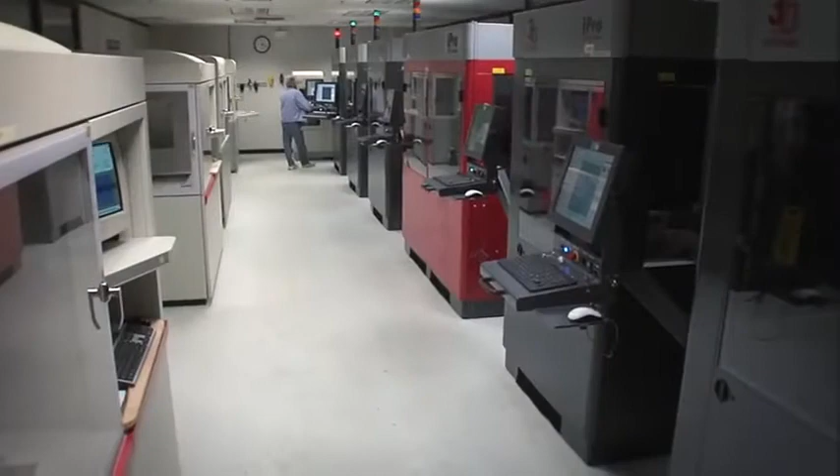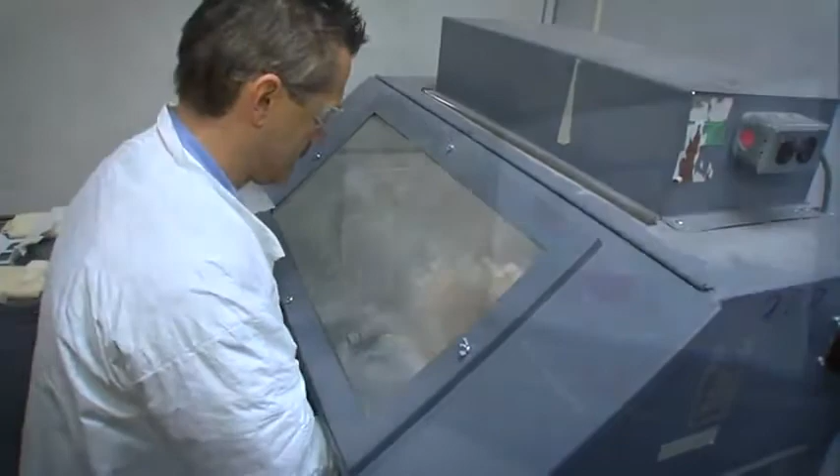This facility is operated by UAW 160 employees with some of the most competitive work rules in the corporation. These are very talented men and women, wood model makers, metal model makers, who basically operate these machines 24 hours a day, 7 days a week, 365 days a year.

These employees, these model makers, have taken their classic training and applied it to this new technology and come up with several innovations. In fact, some of the innovations that these men and women have created have become industry standards. Our technicians work so closely with 3D Systems manufacturing people that it has helped them modify their equipment or actually bring enhancements into the trades and the industry.

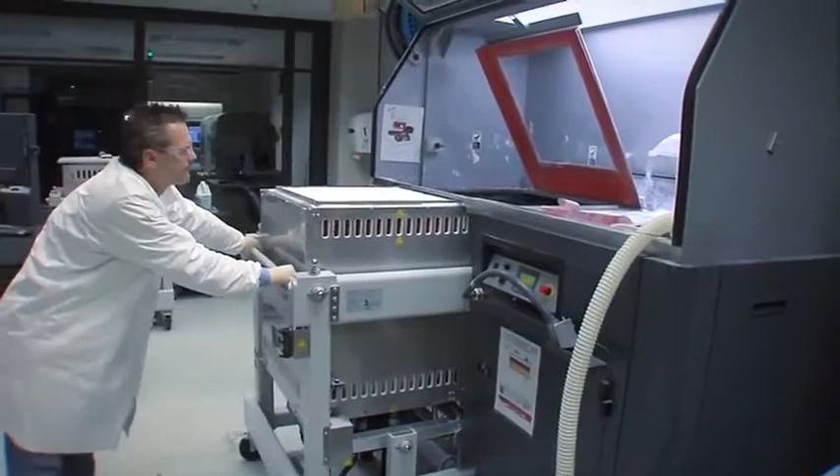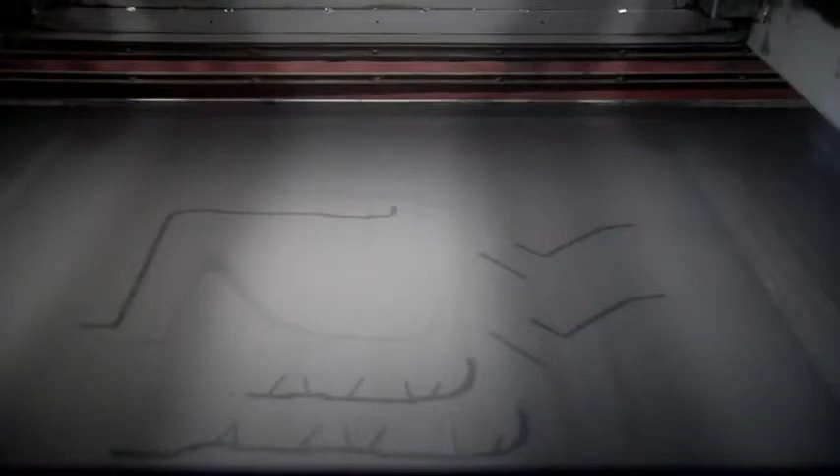Years ago, you would actually have to manually load those machines with this powder and mix those powders manually and then insert them. So they worked in conjunction with our folks to actually find automating ways of loading those machines. And through those ways of looking to automate them, we also found out, well, let's not look at just that. What about recycling some of this older material? Instead of just using always virgin material, let's go ahead and actually mix a blend of reused material with new material. And they've actually developed a machine station that combines those in one.

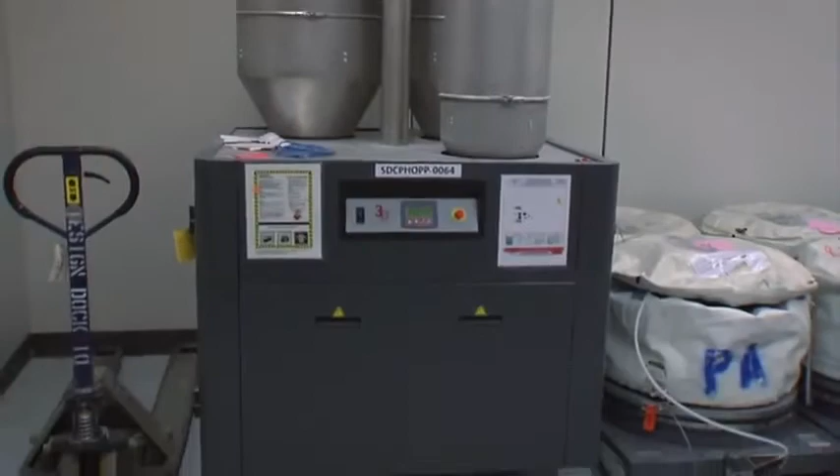To date, we calculate somewhere around 30% recycling benefit for us. And that again was with the collaboration of the local 160 skilled trades folks down here in this very lab. They never stop amazing me on how they come up with better ways to do it.

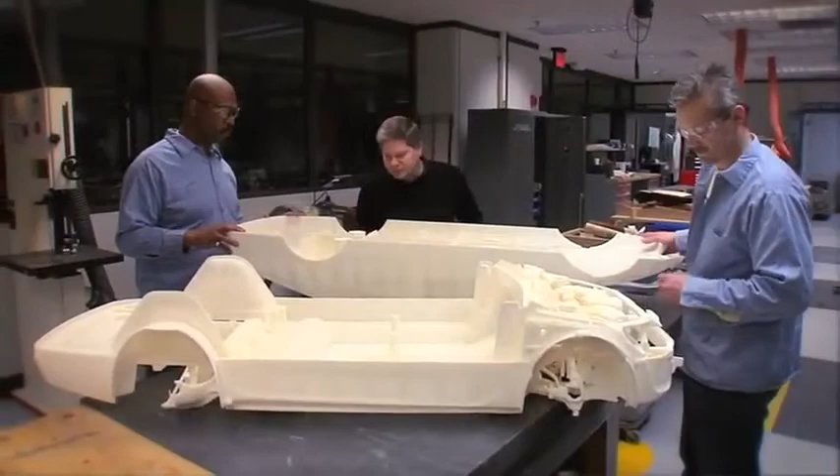I'm a wood model maker by trade. I've been in the RP lab for 15 years. The more I saw of it, I worked with it, and then I got into the department, and it just grew from there. It's unbelievable.

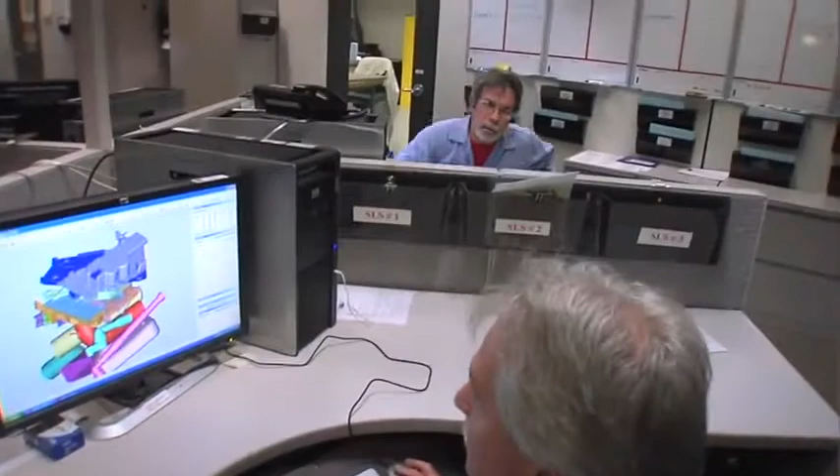And just seeing it advance, it's just great. I mean, things that we do now within a day or 2 days would take months to build by hand. We are really dedicated to what we're doing. That's the main thing. We all enjoy the work and we want to see a good product come out, and that's our main goal.

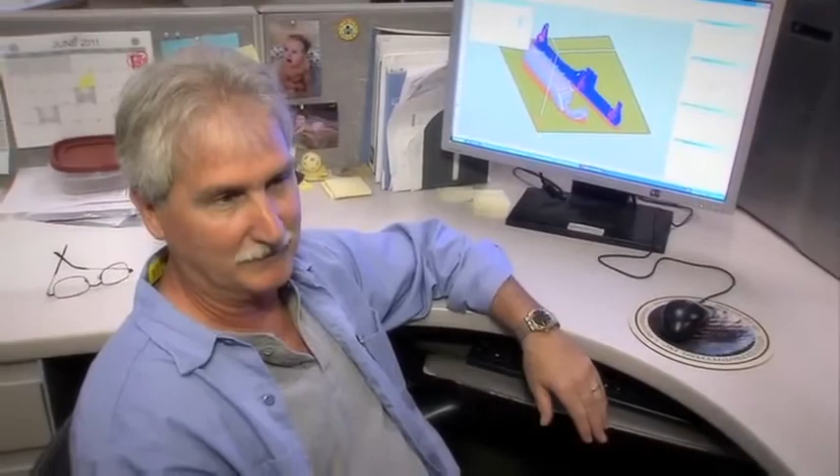It's come a long way from when we started.

I worked for GM for 27 years. I'm a wood model maker by trade. I worked on the SC machine prior to that, but just cutting up parts and manipulating parts, understanding how they work and function and whatnot.

So as the hot jobs come down, like this one here, I was able to quick cut it. I was able to put them in the top of this shell here - I call it a shell. You can see these are the windshield wipers they needed right away, so I was able to place them on top of a build. I never miss a beat and they just keep going.

Been a pleasure working here. We got a good group of people here. Enjoy it. So I got another 10 years or so.

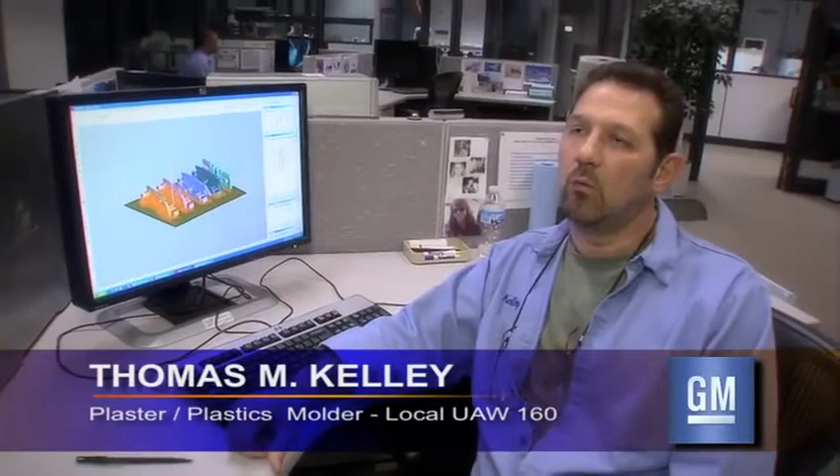I'm the newest person, one of the newest members here. I came in with 3 other people. Well, one of the appeals was because it was a small group, and also I wanted to learn more about the computers and how to do these types of things. And I found it fascinating that you could take a laser and make a part out of it.

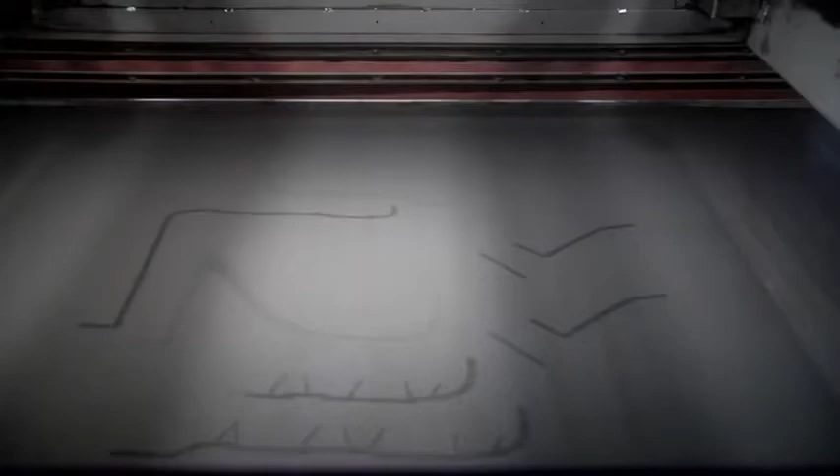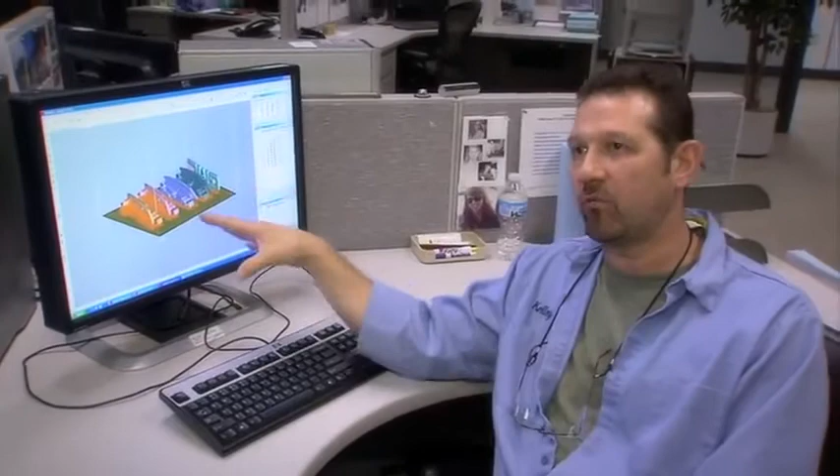Well, there are several ways that we use our creativity, you might say. And one of them is the setup of the jobs. We have to look at the part and see how it can fit on this platform in order for it to be made on the machinery. You have to look at it different ways, so you have to have good spatial relationship skills. Pieces that won't fit on these platforms, we have to make them in several pieces sometimes in order for it to fit on the platform.

I asked my daughter, but she's really not interested in this stuff, but my son, he would definitely be interested. So with the right training, maybe one day he'll be able to get a job here.

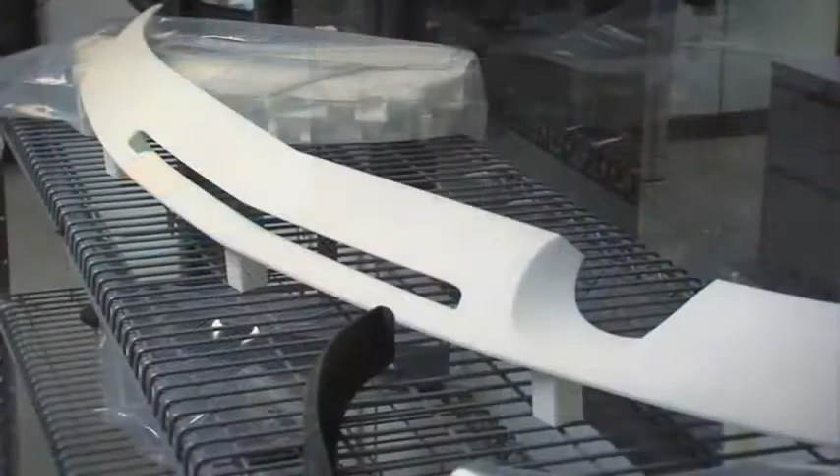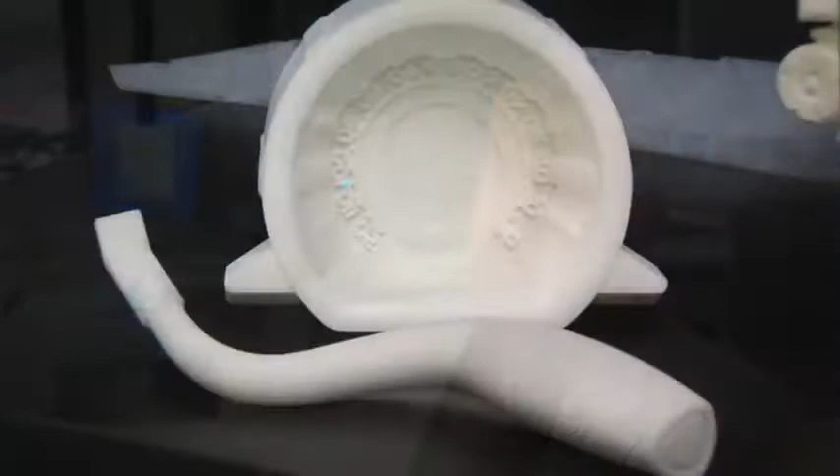We once upon a time used to be the plan B - oh, I forgot to get this part in the system, let's go to RP and get it made - to where now we're plan A. Hey, let's go there first, let's try to get it made there. Why spend the green dollars? Why make the tooling changes and the tooling costs up front when we can actually utilize the rapid prototyping lab right now?

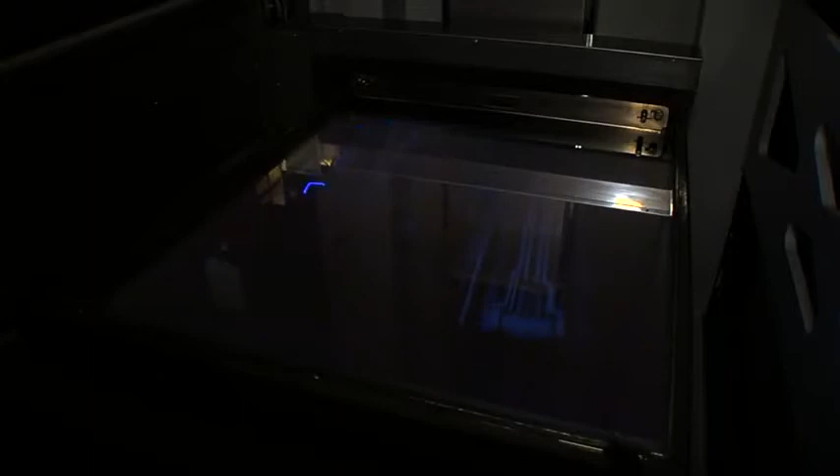I don't see any end in sight for the use of this technology or General Motors' use of this technology. It is a way to reduce product development time, saves costs, gives the designers more options. As such, we've been able to continue to grow, and I don't see that stopping anytime soon.